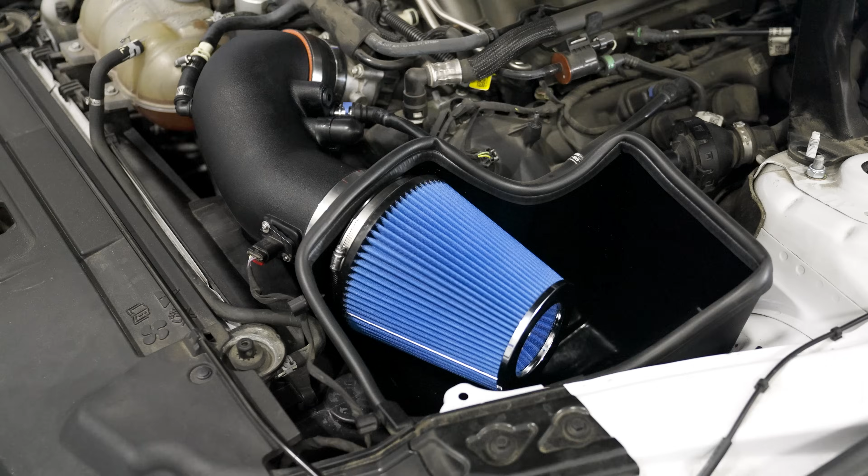We're going to show you how easy it is to add a tune, then a cold air intake, and then splash in some E85 on an otherwise stock Mustang, and let's show you what the difference is.

All right, so we're gonna go over a lot of things in this video, so make sure you look below at the timestamp. So if you wanna skip to a certain section, like when we install the cold air kit versus when we do the tune, maybe when we do E85, you can see that below.

But first and foremost, we're gonna talk about tunes and what is a custom Steeda tune for your vehicle. Well, the SCT tuner comes with pre-loaded tunes. So what that means is you're gonna plug it into your vehicle. It's gonna recognize your vehicle. It's gonna tell you the VIN number and things like that. It's gonna have a couple pre-saved tunes in there.

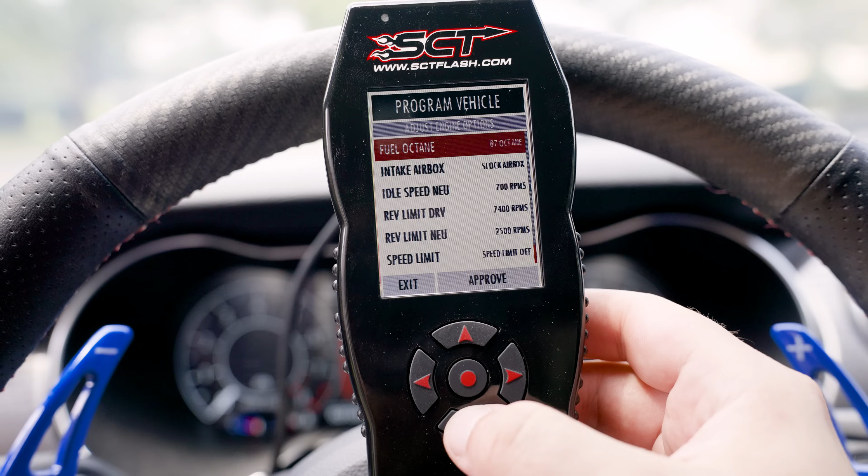Now those are kind of just run-of-the-mill tunes. It's kind of like a one-size-fits-all. They're gonna have a little bit more timing, maybe a little bit better throttle response. It's gonna be very safe, very conservative. The beauty of it is not only does it make more horsepower, but you're gonna use less fuel too, which means you're not only gonna get a gain in performance, but you're gonna be saving money every time you go to the pump as well, which is an absolute no-brainer.

Now that goes for Mustangs, Fusions, F-150s, even F-250s. I've got one on mine. I picked up almost 4 miles per gallon by going with an SCT tune. And that's just your run-of-the-mill. But for those wanting more, we offer you the Steeda custom tunes. Well, what is that? If I get a tune with this, why do I need a custom tune? Well, it's exactly that. It's a custom tune.

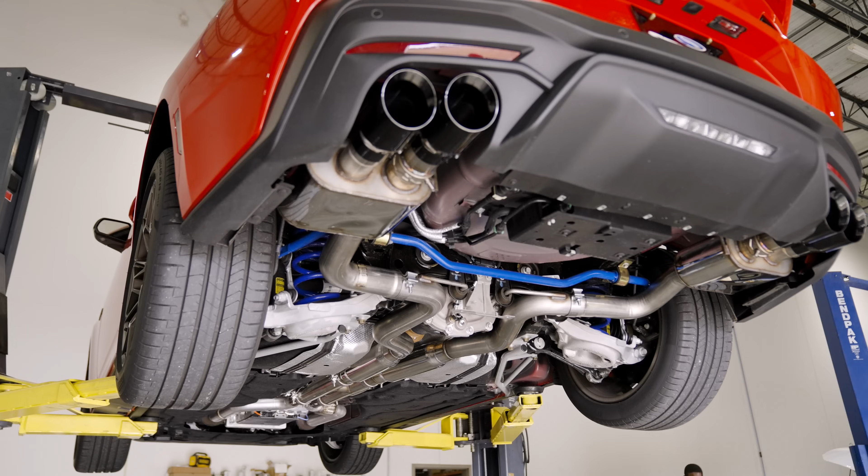You'll see we have a tune order guide. It's gonna allow you to select what kind of modifications you have to your vehicle. Maybe you've got a cold air intake. Maybe you've got high flow exhaust, different diameter wheels and tires, maybe a different gear ratio, or maybe a looser torque converter. These are all things that we take into consideration when we develop our Steeda custom tune.

Now that's gonna be different than the out-of-the-box tune. We're gonna be looking at the exact mods that you have on your car, look through our database, what works, what kind of improvements we can make to take it to another level. So you're looking at a little bit more timing, a little bit better throttle response. We're gonna look at all those variables that you've added to your car, and we're gonna design a tune that's custom built just for you.

Now, that's kind of in the middle, right? You could also do a custom dyno tune. Now that's actually strapping the car to the rollers, loading in a base tune file. Then you're gonna do some wide open pulls. We're gonna come back, we're gonna look at the data and tweak it from there. That's gonna be the most performance possible. But depending on your application, you may only be talking about a couple horsepower.

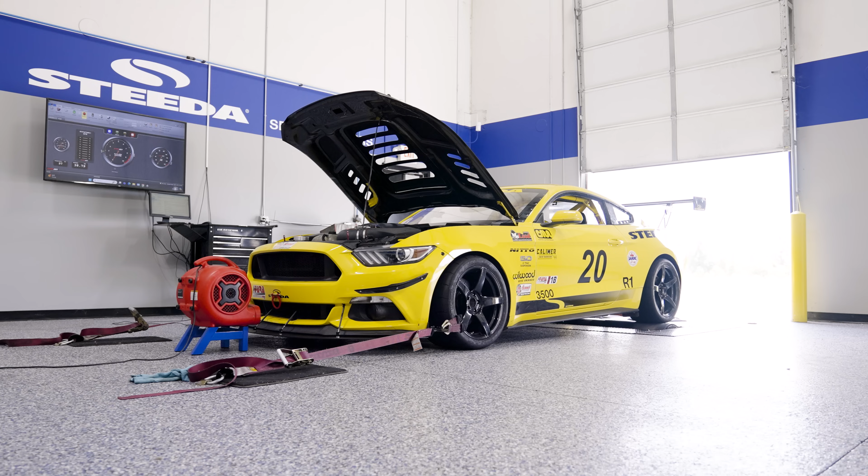Let's say you got aftermarket camshafts on your car. That'd be a good time to do a custom dyno tune, right? Where you could really manipulate and move those cam profiles around to try to get the most horsepower out of your car. So that's a full-blown custom tune specifically for your vehicle.

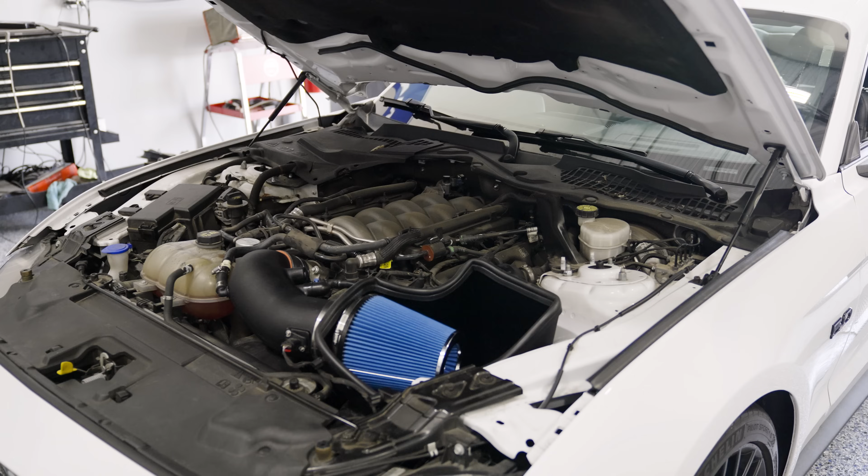But now the Steeda custom tunes, it comes from the same database, right? We've dyno tuned thousands of cars over the years, and we have logs of all those files, what made them happy, what made the most horsepower, but it's taken those specific mods that you've decided to put on your car and trying to maximize and get the most performance out of that tune. That's the beauty of our Steeda custom tunes.

They're tried and true, and like I said, it's not gonna be on the ragged edge. You don't have to worry about detonation, but it's going to offer you more performance than your typical out-of-box SCT canned tune. But if you do have the device, obviously, then you can always go to one of those canned tune options as well. But our Steeda custom tunes are gonna provide you with the next level of performance. The one thing to keep in mind is all of our Steeda custom tunes do not defeat any emissions equipment whatsoever.

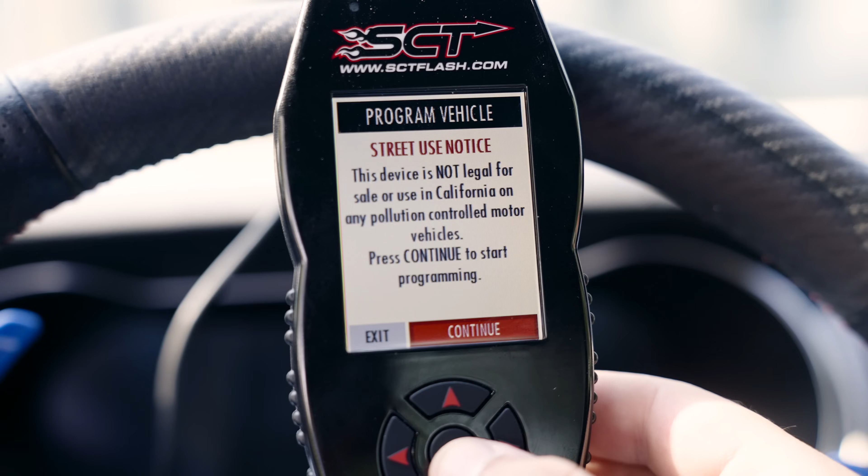So if you do have long tube headers and you use your car for off-road use, unfortunately that check engine light is going to be on because we do not mess with any of the emissions equipment on your vehicle. Unfortunately, if you live in California, tuning devices like these are prohibited, so unfortunately you can't get all those horsepower gains that the rest of us can see around the United States.

Now the other beauty of these tuners, right, you can actually plug this in and it's got a code scanner to troubleshoot any codes you might have. So you simply plug it in, you go to the correct menu, and you can see exactly what code your car has. You can even turn off the code as well to get rid of that check engine light. Say maybe an air intake temperature sensor, right? Triggering, throwing the check engine light. You go ahead, pick it up at your auto parts store, change that. Now you plug back in your tuner and you're able to clear that code.

So we could actually be married to one vehicle, right? Because the tuner is only going to tune one vehicle. But you could still use it as a diagnostics tool for all the other cars that you have at your home. So like I said, it really does pay for itself.

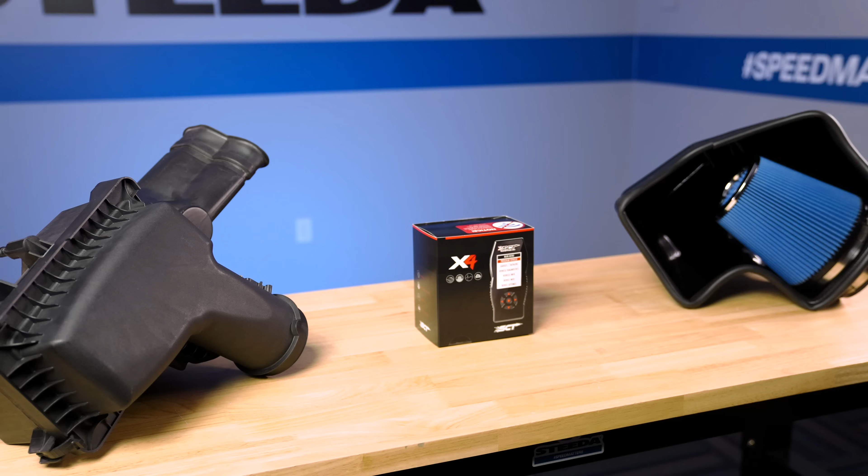Now this is the SCT X4. We also offer online the BDX. What's the difference between the two? Well, the SCT is going to plug directly into your vehicle. Let's say you're out in the country, you don't have Wi-Fi, you're going to want the SCT.

Now the BDX works over Wi-Fi, so you're going to have a Wi-Fi signal for not only the BDX, but also for your car. But if it's something where you like to display it up on your dash, the BDX does look nicer, but they both have the same functions. We actually do lean towards the X4 because with it plugging directly in, you don't have to worry about that Wi-Fi connection, but both are really good products that are going to give you exactly what you're looking for.

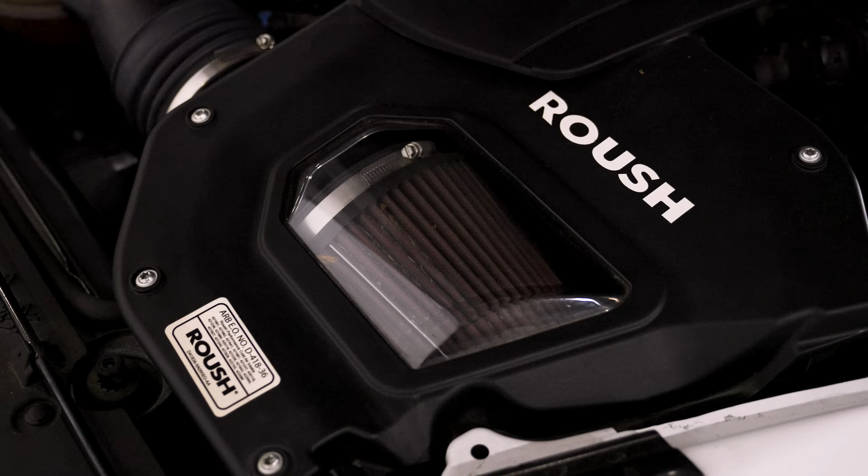So you might be asking yourself, well, why do I need a tuner? Why can't I just buy the cold air kit and throw it on my car? Well, there are cold air kits on the market that do not require a tune. And the reason why is they don't actually increase the size of the mass air meter. So the meter is the same size as stock. They're just adding a fancy box and a high flow air filter, maybe even the tube to the throttle body.

But when you're doing that, and it's the same size mass air meter, the only additional airflow you're getting is from the air filter itself, right? Maybe the tube's a little bit smoother, but if you really want to make horsepower, and we've done this on all of the cars since 2005, we're going to increase the size of the mass air meter. You could actually add a cold air kit with a larger mass air meter, not tune your car, and actually hurt or blow up your motor.

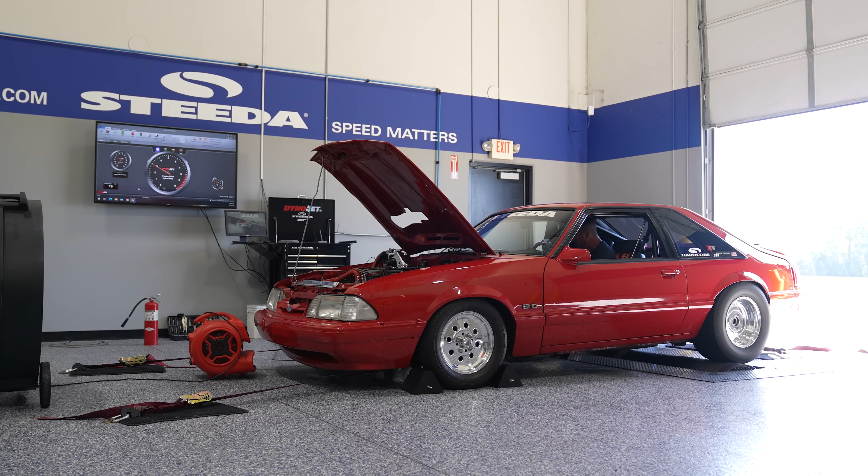It's crazy. Some of these newer cars, they don't have the adaptive strategy to learn like the older generation cars. But even back in the days with the Fox bodies, if you bought a larger mass air meter, it needed to be calibrated to your fuel injector size. Once again, it wasn't done with any crazy tuning. It was done at the mass air meter with a changed signal going to your computer, calibrated for those specific injectors.

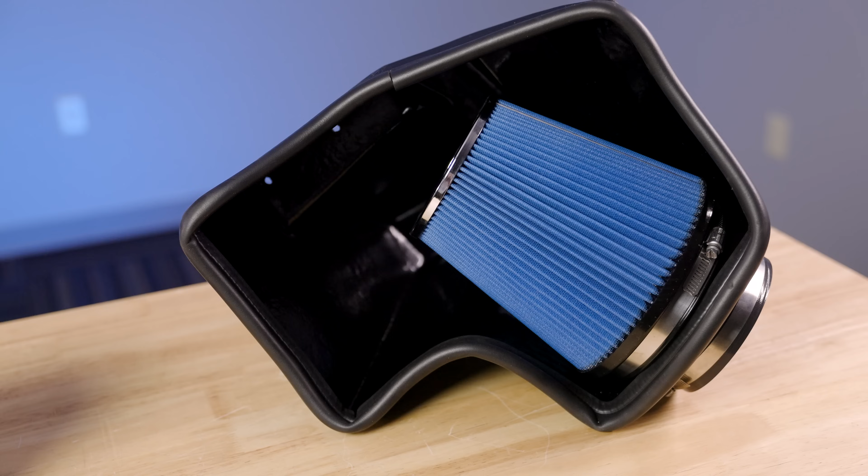So keep in mind, if you want to add a cold air kit and you want to make power, you've got to go to a larger mass air meter, and that's when you need the tuner, because that's going to take advantage of all the things you've changed to really maximize your performance.

So let's touch real quickly on how do you get your Steeda custom tune. Well, the first thing you're going to do is you're going to purchase the tuner and request a custom tune. Now, we can't just send it to you with all your modifications on your car. Why? Because this tuner has a specific serial number on the back.

Once you get your tuner from Steeda, you're going to plug it into your vehicle. It's then going to pull the strategy code off of your vehicle. Once we have that information, you could fill out your tune form, all the modifications, exhaust, change of gear ratio, cold air intake, things like that. Now we'll be able to develop that custom tune just for you.

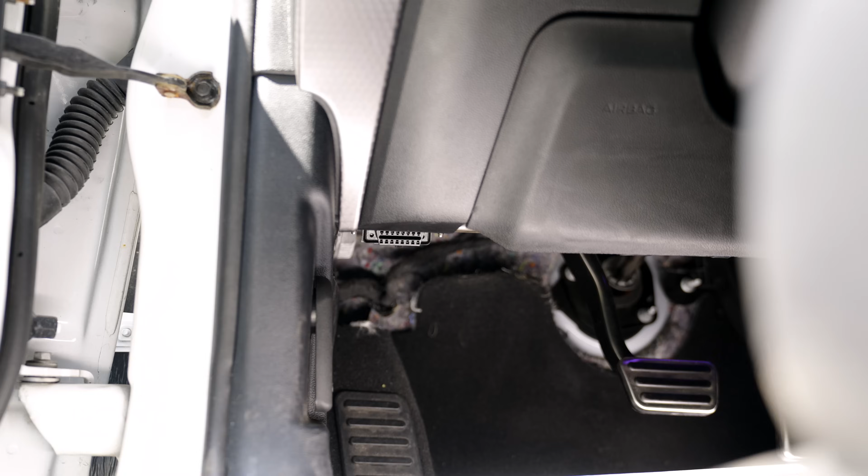The first step is to find the OBD2 port on the interior of your vehicle. Use the included cable to connect the device to the vehicle. The device should turn on automatically once it's plugged in. If not, check for any blown fuses for the OBD2 port.

Navigate to Vehicle Info to get the strategy code. Power on the vehicle, but do not start the engine. Then you can hit Continue on the device. You'll want to go ahead and take a picture of the screen or write down this information. We're going to be using the ECU SWPN number for this specific vehicle. After you get that code, you can now turn the vehicle off.

To fill out the tune form, go ahead and visit Steeda.com and scroll all the way to the bottom to Tune Build Form. Enter your information as follows. This is how we get the tune to you, so make sure the information is correct. Your order number can be found in the email for your order confirmation. The vehicle information can be selected on the second page.

Now make sure you have that picture handy that you took from your tuning device because you're going to need it now. Now you'll be prompted to enter the ECU SWPN number and tuning device information here. Now locate your serial number. It can either be found on the back of the device or within the device under Device Info. Go ahead and enter the number and double check to make sure everything is accurate.

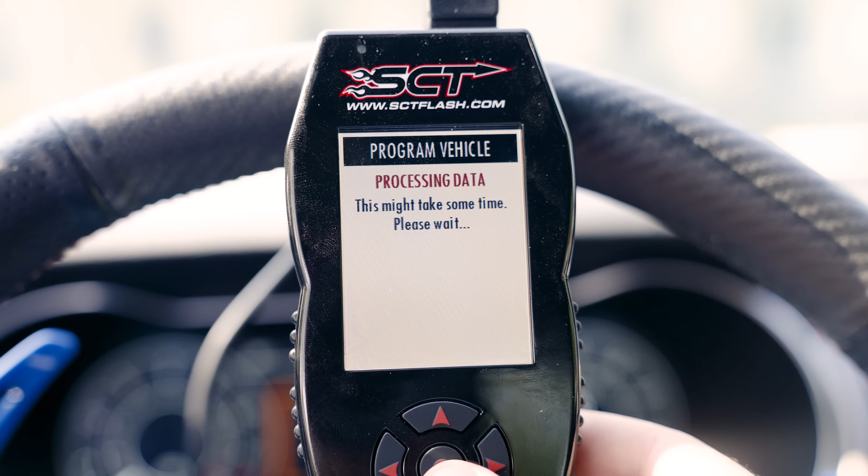If you're just looking for the SCT box tunes, your device may need to be updated. This is how. Use the link in the description to go to the SCT site to download the updater software. Everyone will need this software to upload the tune from your computer to the device. Install the program and open it up. Then use the USB cable to connect your tuner to your computer.

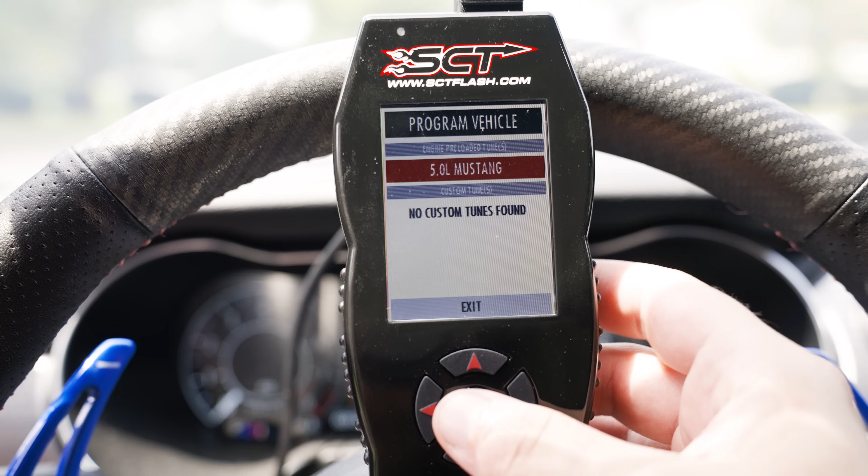Once you receive your custom tune in the email you provided, download it and save it on your desktop so it's easy to find when we upload it to the tuning device. Open the device updater. Plug in your device to the computer, then click on the second option, Load Custom Tune File. Hit Browse and navigate to where you saved the custom tune file. Then Open. Make sure the tune file is selected, then you can click the arrows to add it to your device. Once you see the file move to On Device, click Program to upload the custom tune.

This will take a minute or two. Just make sure your device doesn't disconnect during this time. Because we have a second tune, we're going to load that onto the device as well. The X4 is capable of storing up to 10 custom tunes, while the BDX, well, that's capable of storing 20 custom tunes.

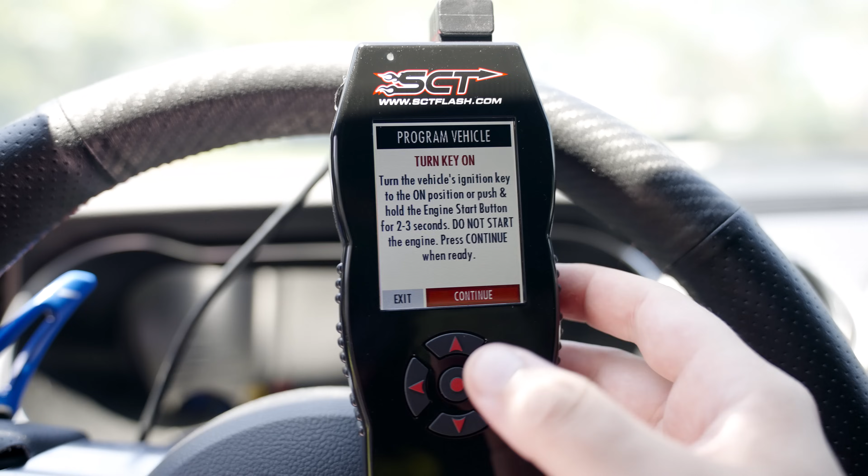Once the tune is loaded, you can press back, exit out of the program, and disconnect your device from your computer. Back at the vehicle, you can now see under Program Vehicles, there are 2 tune files that we've just uploaded. Now in the future, if you make large changes to your vehicle, like going from a stock intake to the Steeda intake, you'll need to request a new tune.

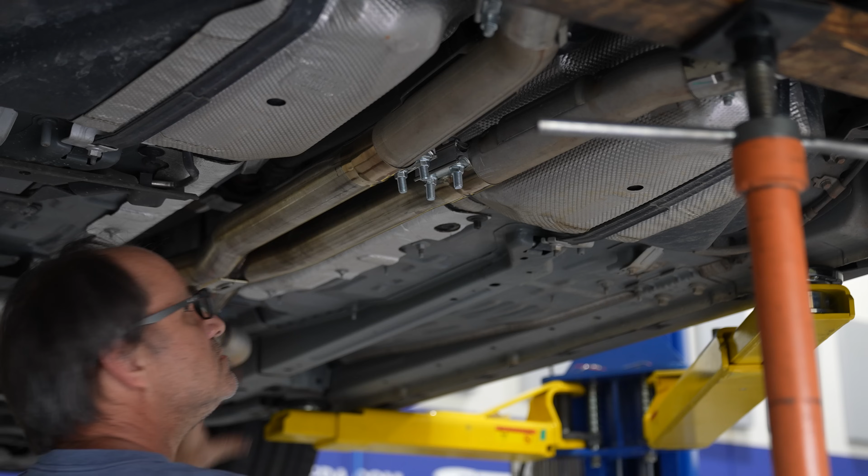All right, so we finally made it to the dyno room. We've got our 2020 Mustang. It's bone stock minus the Steeda X-pipe, but that X-pipe is gonna be on it for all the testing. So we've strapped it down. We're gonna get it up to operating temperature. Let's see what kind of power it makes.

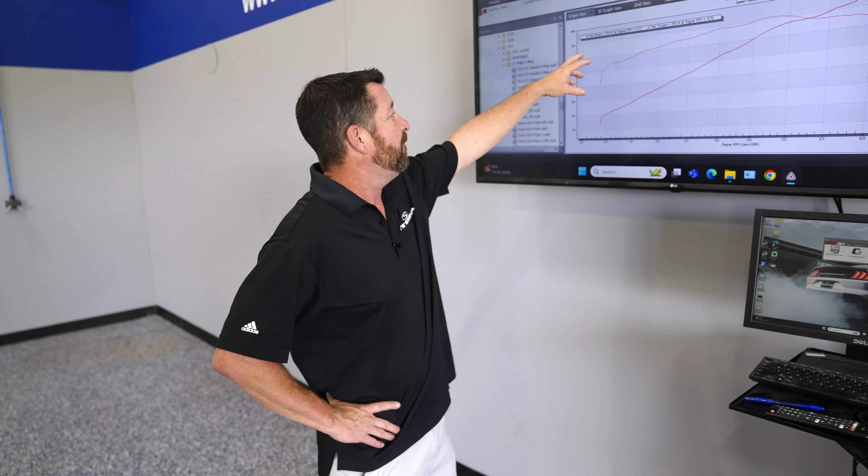So we just got done making the first pull with this 2020 Mustang. We did it in 6th gear because it has the automatic 10R80 transmission. First pull, 370 horsepower, 356 foot-pounds of torque. Now, we'll go ahead and flash the ECU, load that Steeda tune, and we'll see what she does.

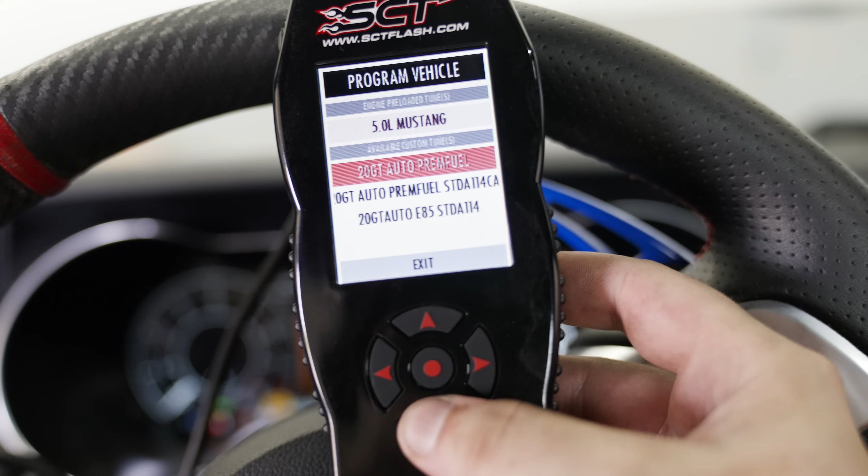To upload the tune to the vehicle, select Program Vehicle and turn the key to the on position. Then, select the custom tune you would like to load. There are further options that can be adjusted, but in most applications, you can just leave these and hit approve.

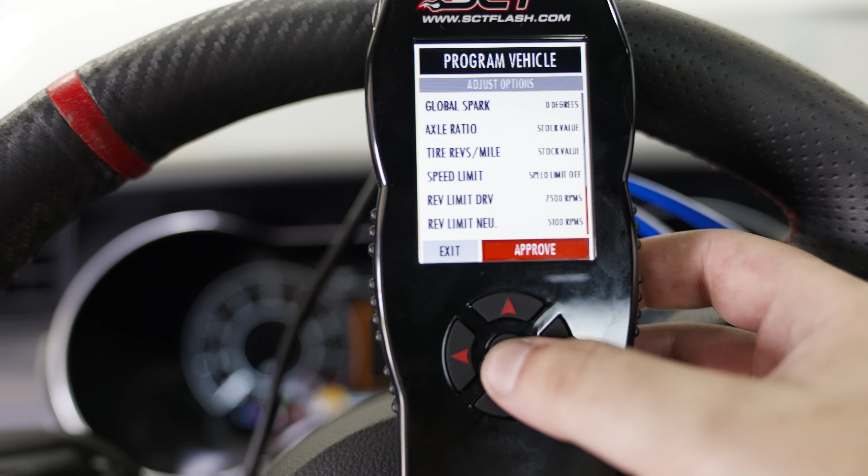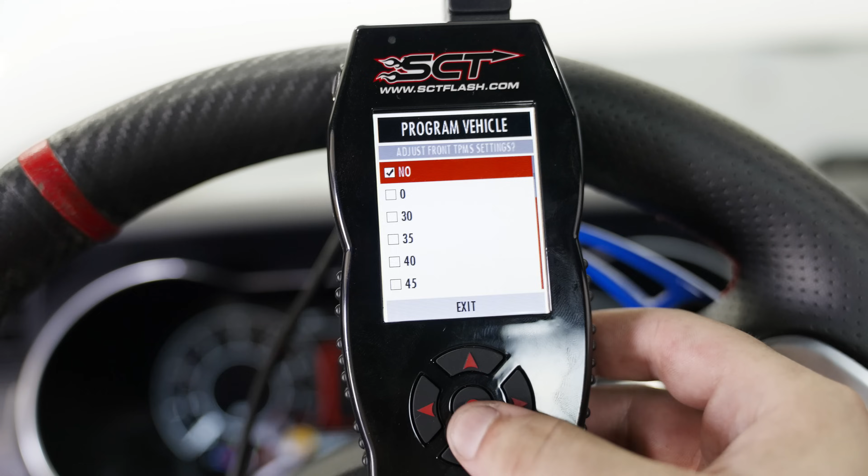You can now adjust your tire sizes if changes have been made. You could also change your gear ratio here as well. This is a 10R80 PP1, so it has the factory 355 gears. If you want to adjust the TPMS settings, you can do that now also. Now hit continue and the tuning process will begin.

You may be prompted to power the vehicle off and on, so pay attention to the directions on the device, otherwise it'll have to start this process all over. This process can take 15 to 20 minutes, so be patient. When it is finished, it will clear any codes and then you are good to go.

All right, so we just loaded up the Steeda tune. This is for a stock Mustang, stock intake manifold. Power jumped up, 370 to 381. That's pretty good. And 356 foot-pounds to 365. And you'll see the first pull's in red. The blue is the second pull with the tune. It makes more power everywhere.

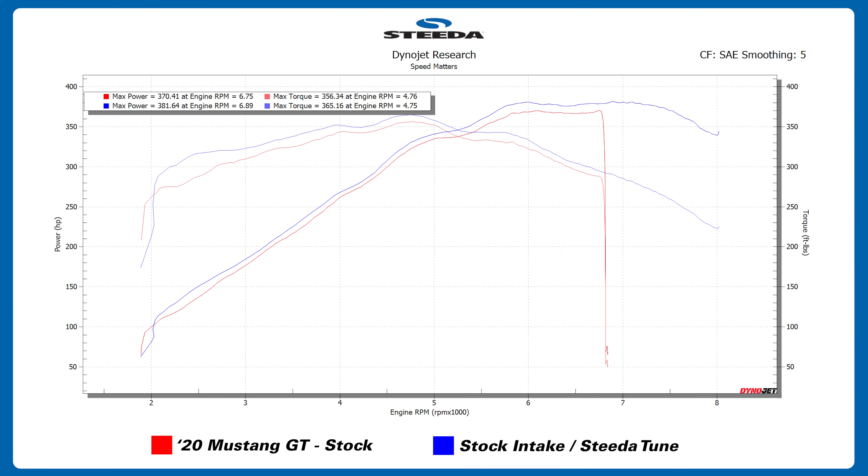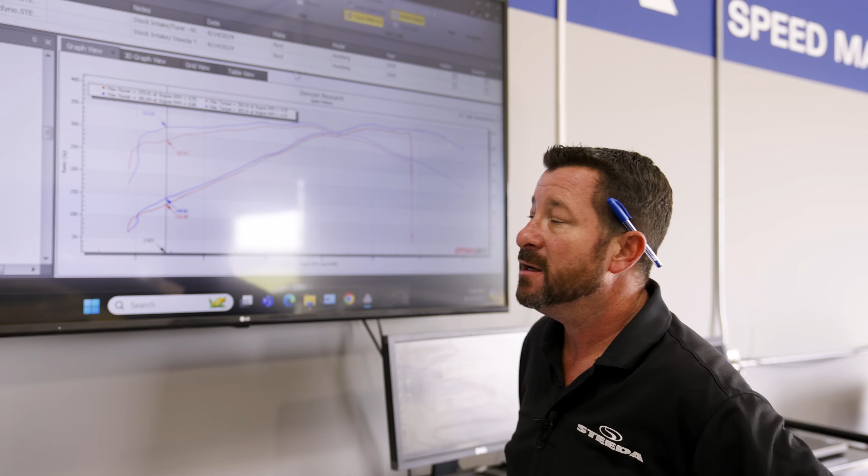The biggest thing is right here, from 2,000 to 4,000. That's when you're gonna spend the majority of your time running around town, stoplight to stoplight. You're looking at 30 foot-pounds of torque at about 2,400 RPM. That's incredible. That's 10% more foot-pounds of torque. So that's gonna leave you feeling really good down low.

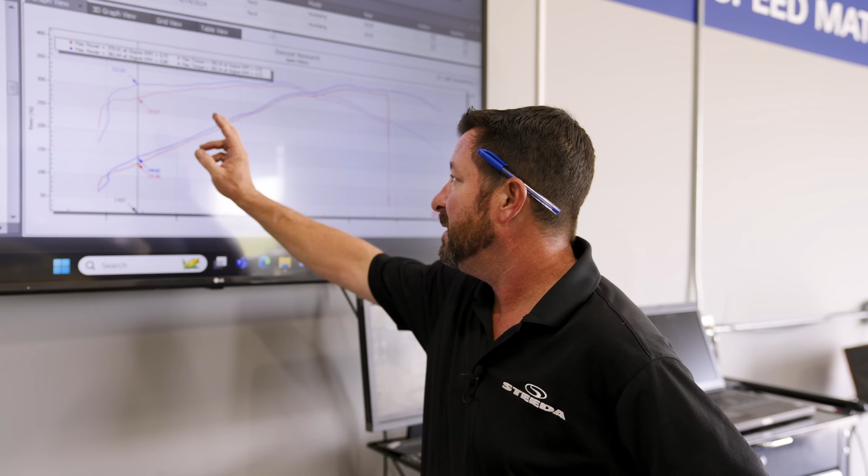And even if you wind it out, not sure why we revved it to 8,000 RPMs. Jamie's kind of crazy. But it'll rev all the way to 8,000 RPMs, but more power everywhere, better fuel mileage, the ability to customize a tune later on down the road for future mods. That's why I always tell people you can't go wrong with an SCT tuner. Good results. Now we'll throw on the cold air intake.

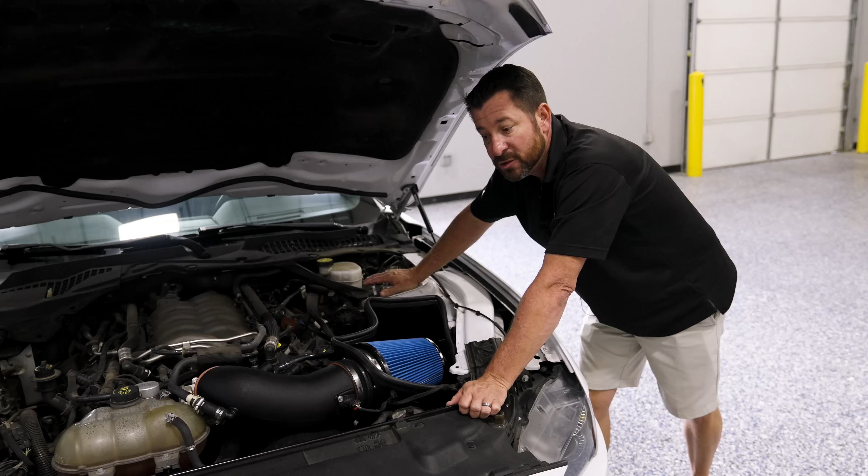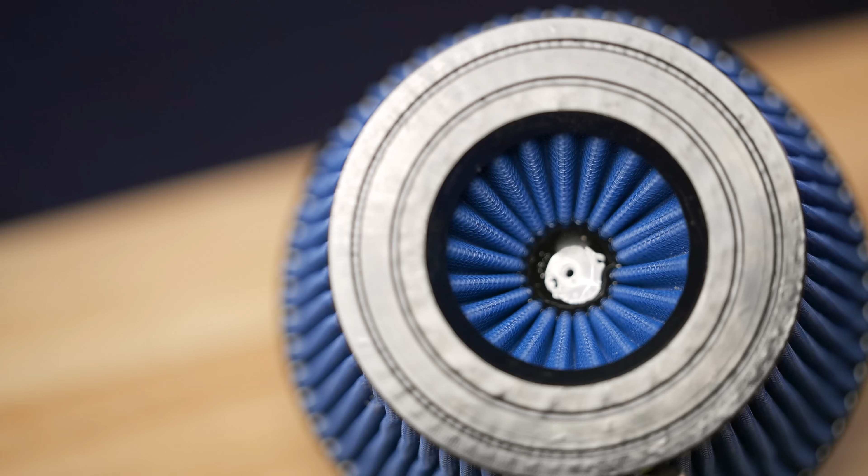So here we have the cold air intake installed on the Mustang. Now there's the open air design. It's different than the closed lid. The closed lid we recommend for maximum performance. Why? Closed lid, ram air effect. This is great for all around daily drivers, right? People like to go to car shows and pop the hood. Nice, bright, reusable filter, power stack at the end, velocity stack.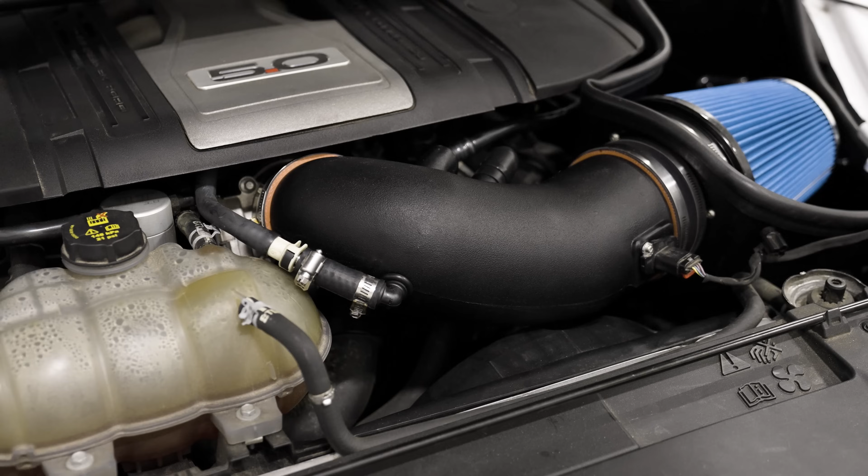Now what's the velocity stack? That is a tapered cone that the filter bolts up to, to help funnel air in. What we're trying to do is we're trying to increase the velocity. It's also going to give you a much better signal for your mass air meter. The rotomolded tube is going to try and direct the air, get it up top before it's going to go down into the throttle body. We're trying to straighten out the airflow. In theory, it's going to make more power. Well, there's only one way to check that theory, and let's make another pull on the dyno.

All right, so we just added the Steeda intake. This is the open lid intake. Therefore, the mass air meter is gonna be physically larger. Anytime you do that, you're gonna need to retune the car. Well, thankfully, it's our cold air kit. So we took our Steeda tune for a stock intake and applied it to the Steeda tune with our intake. Same timing, fuel trims had to be changed, right? Larger mass air meter, we're letting in more air, nice smooth radius on the tube. So the fuel trims changed, timing stayed the same.

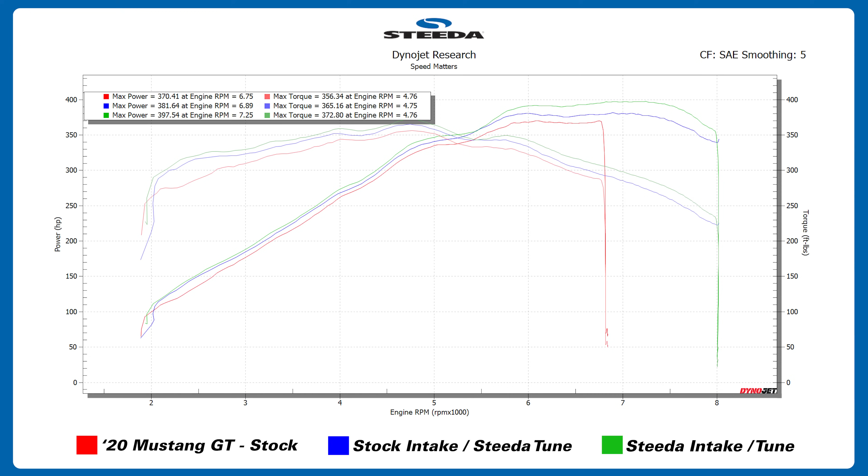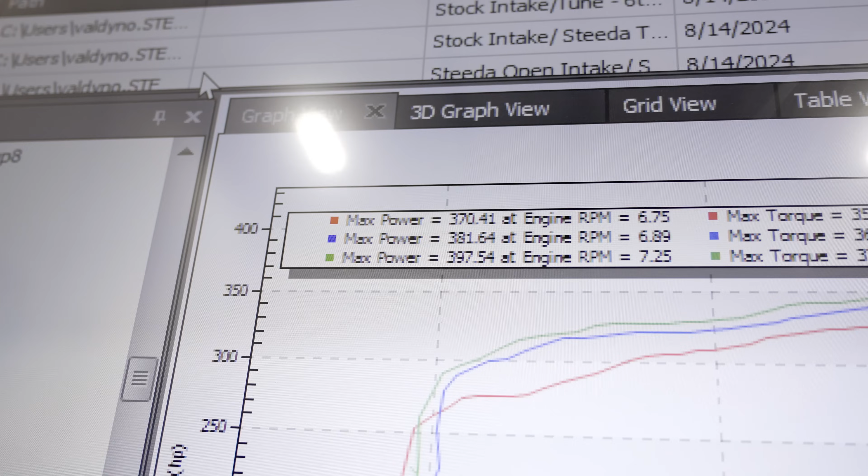And it's ridiculous. We went from 381 to 397. That's a 16 horsepower difference. Oh, it's the tune. No, it made 381 with the tune from 370. So for everybody that says cold air intakes don't work, they work. Proof is in the pudding. So 397 from 381, and then an increase of about 7 foot-pounds of torque.

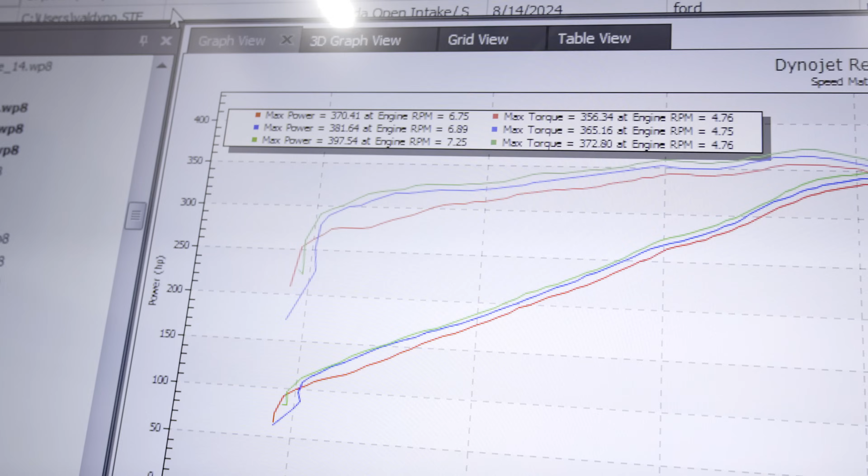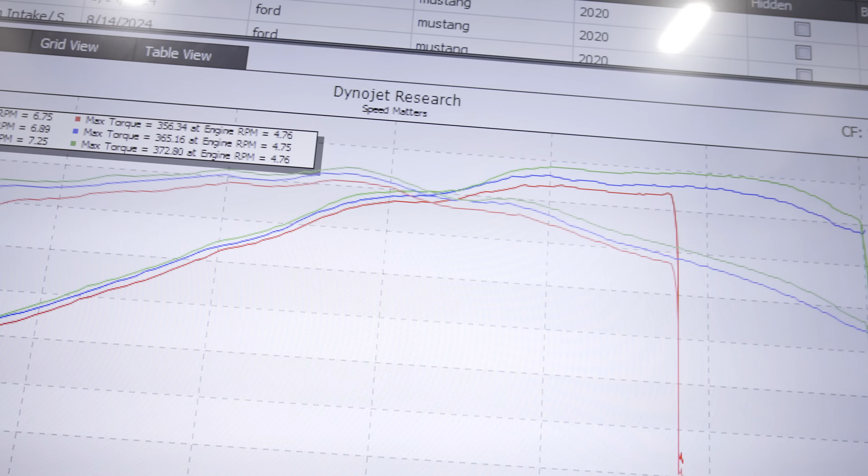The great part is if you look down here, once again, lower in the graph, it's just making more power absolutely everywhere. Now, where does it actually shine? We're pretty close down below, but as soon as those cam lobes start to change, right, and you start retarding those cams for the high RPM horsepower, look at how it just pulls away. Absolutely impressive. I mean, you're looking at cold air and a tune, and it just added 27 horsepower to the tires of an otherwise stock Mustang and about 16 foot-pounds of torque.

So now what we're gonna do is, because E85 is so popular, we're gonna unhook the car, drive it around, get that 93 octane out of there, then we're gonna throw in some pump E85, and then we're gonna strap it back down and shoot, let's see if we can get over 400 or how much horsepower we can get on E85.

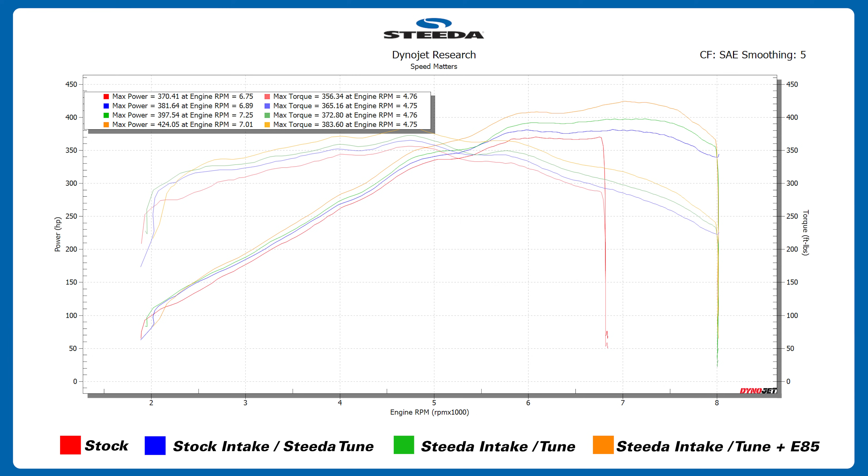All right, this is absolute bananas, right? I always tell people, not every time you go to the dyno do you get the numbers you're looking for. I want to make 450, the car makes 430. Sometimes it makes 460. That doesn't happen all the time. E85 in the tank now, right? Obviously the tune had to change a little bit with the E85. Same everything. Picked up an additional 27 horsepower and 11 foot-pounds of torque. We're talking a 54 horsepower gain and 27 foot-pounds of torque. Tune, cold air intake, and E85.

54 horsepower. That is incredible. For under $1,000, I think it goes for like $960 or something. Absolutely unbelievable, real world numbers. Right here, same day, it's 91, 93 degrees in here. It is smoking hot. But to go from 370 horsepower to 424 on an otherwise stock S550 Mustang, this is why tuning is so important, right? It's not only more timing, it's air fuel, it's shift points.

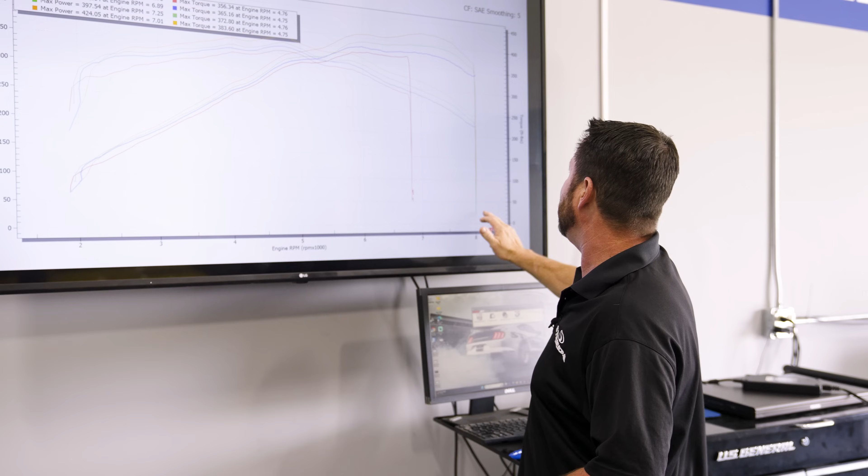Look at it, stock, we're redlining 6,800. Everybody knows the fun doesn't begin till after 7,500. Now it's revving out to 8. Okay, it doesn't need to. We don't have a Cobra Jet on here. But look at the steam it's making up top. Cold air intake, tune, and E85. 54 horsepower? Absolutely unbelievable. Well, that wraps up our testing on this 2020 Mustang.

As you saw, the tuning process isn't that hard, but it is gonna take about 15 minutes to download the file, re-upload the other file, but it's a great device. Not only can it add horsepower, save you fuel, but it also is a diagnostics tool for any of the cars that you have in your stable. If a check engine light comes up, you can read the code, you can clear the code, so it's a really, really good tool. Like I said, better performance, less fuel. I think SCT's motto is more power, less fuel. Doesn't make a whole lot of sense, but it does absolutely work.